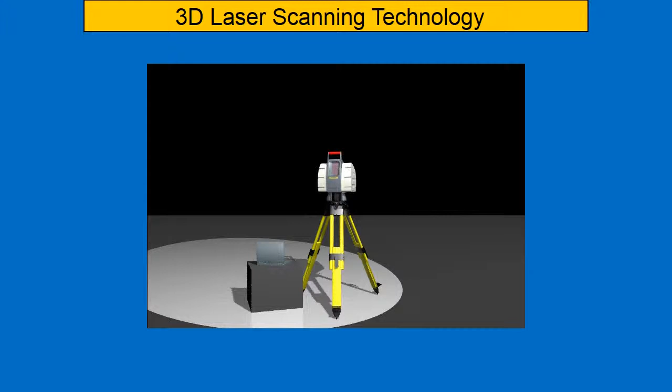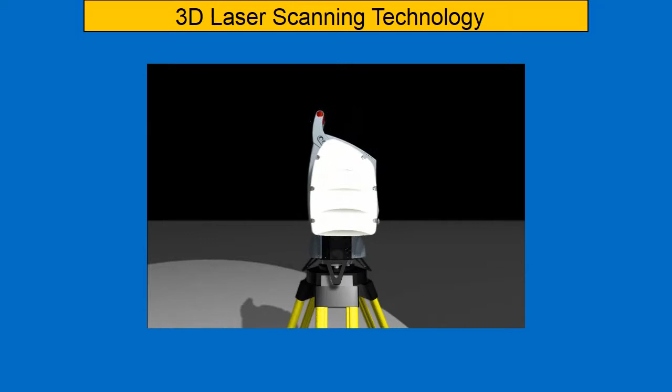Better term, it paints a scene. So here we have a 3D laser scanner, and it uses a green beam to shoot out and measure anything it can hit. It shoots up and it shoots forward.

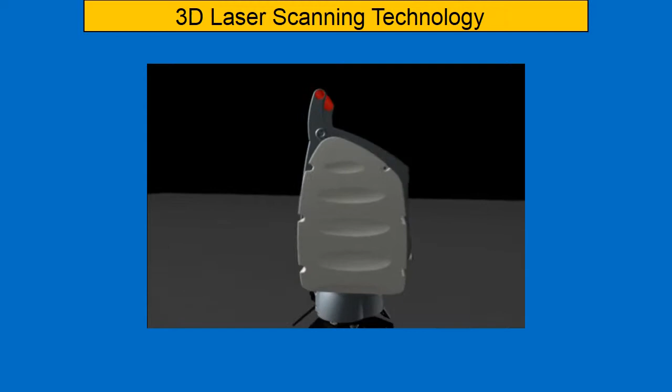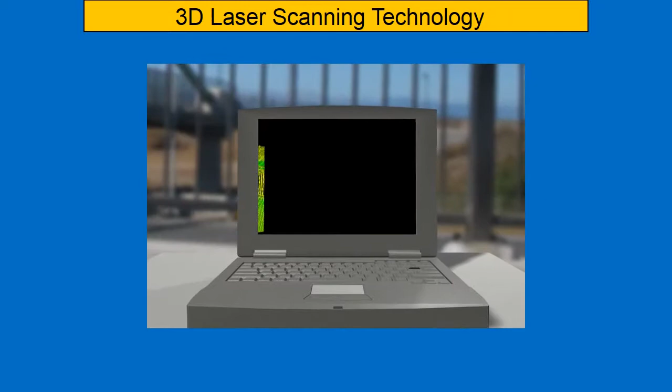And as you can see, it does 360 degrees. So if you had a situation where you had an accident on a freeway or a bridge, this device allows you to accurately scan that scene in 3D and get an accurate 3D model from the end result without ever laying foot on the freeway or on a bridge or on some property that you may not have access to.

It's a very highly accurate tool, about 1.2 millimeters in resolution. It captures about 1 million data points in 3 minutes, and the new ones actually do about 1 million data points in 1 minute.

It allows for remote measurements. It doesn't need access to roadways, and it doesn't need access.

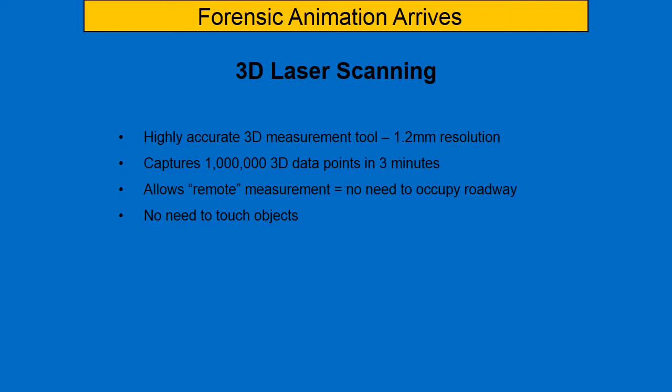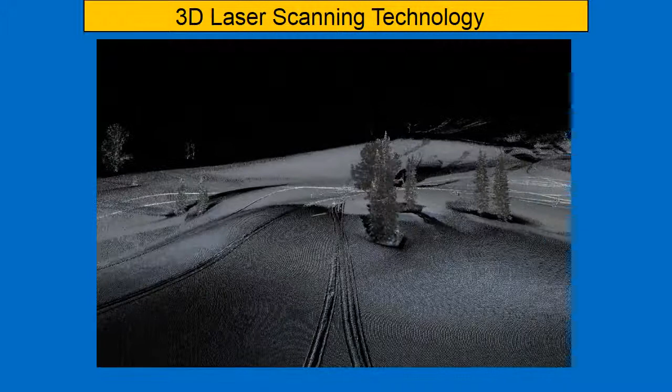So here we have an example of laser scanning at 9,000 feet elevation in eastern Oregon at a snowmobile accident. As you can see, the only way to land there, to get there, was via helicopter.

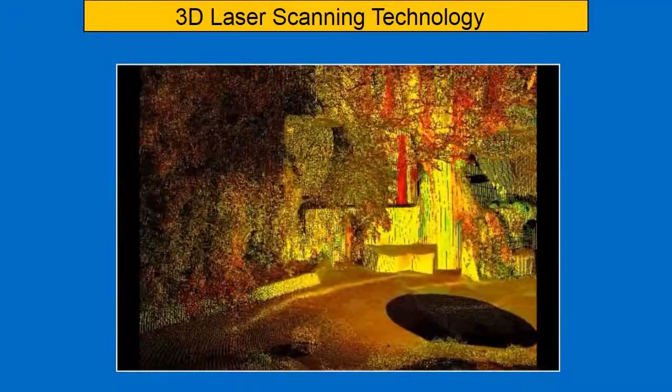This is a laser scan done of the tiger exhibit inside San Francisco. As you can see, when you take a look at it, the laser scan picks up every leaf on the tree, every twig, every branch, every bush. More importantly, it gets the exact dimensions of the wall, the bushes, the heights. And it's hard to see on this resolution on this screen, but it is actually able to pick up the claw marks left behind by the animal as it jumped out.

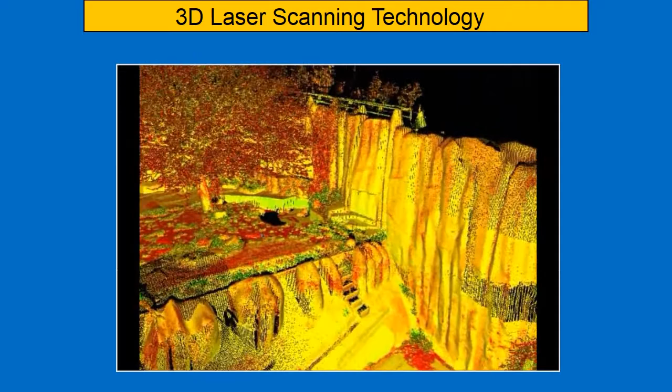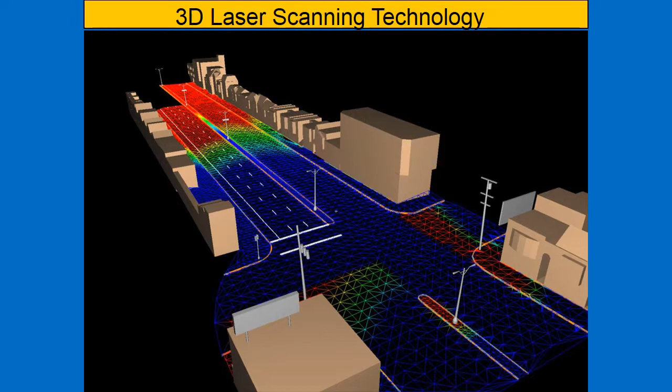So obviously, when you have 3D scanning as your base, making 3D models from that base is extremely precise. Here, basically, the scanning technology. This is San Francisco area.

And so, in conclusion, any measurement an expert desires is available, and this is very important. Never need to return to a scene to get one more measurement. Often, experts will go out, they'll take measurements, and then new evidence will resurface, new ideas, new theories will happen, and the expert may have to go back to the scene because they're looking at it from a different angle now, not having captured all the data they want.

Well, none of that happens. You capture the scene and you have it. If you need to go back and take a look at it, it's all done in 3D.

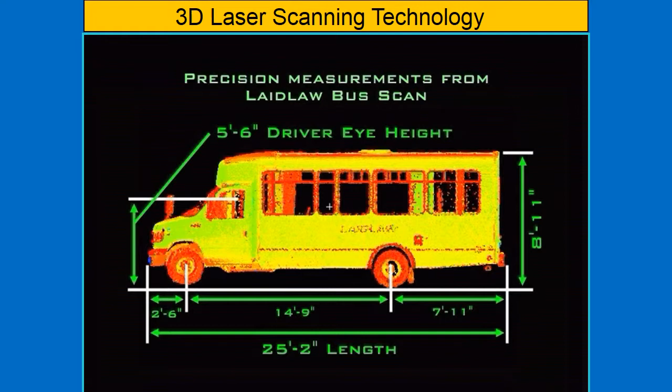So here's an example, precision measurements of a Laidlaw bus. As you can see, when you do a vehicle, you can get exact dimensions, exact wheelbase, exact eye height. Any dimension that would possibly be needed by your expert is captured.

Real quick, this was first admitted in Honolulu and then submitted again in San Francisco, and now it's routinely admitted in trial at all times.

One of the great things about now having 3D scanners and 3D data is you can use what's called a 3D working model. Imagine often experts will want to recreate the scene, maybe go out to the scene, do a line of sight analysis, maybe do a speed analysis, maybe figure out how a vehicle lined up with a wall that it crushed, or get two vehicles together to see how they impact.

Advantage of scanning everything is this allows you to have these working models, these ideas to recreate and run scenarios, but you don't have to do it at the scene, which you may have limited access to or no access to, and can do it all in 3D.

It also allows you to do very complex what-if analyses. What if the speeds of the vehicles that were hitting were at different speeds, different locations? All these scenarios can be done over and over and over again inside the computer in a matter of days, which may be impossible in the real world and take much longer.